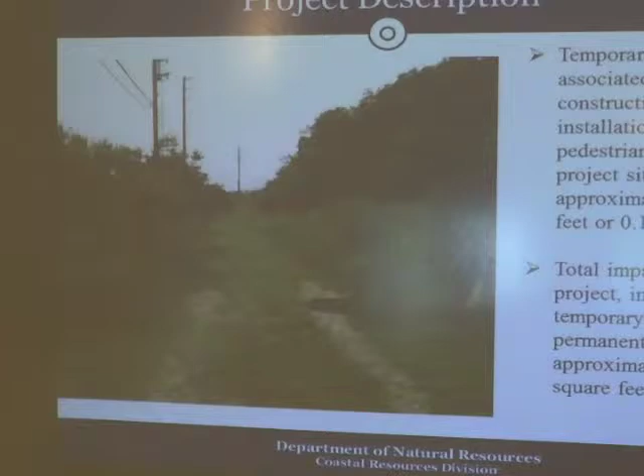In addition to the boardwalks, for pedestrian and bike use, there's also going to be temporary impact associated with installation of silt fence, and no equipment will be operated in the marsh. We identified areas where someone would need to manually install, so it'll be foot traffic only, and again, it is temporary. Total impacts for the project, again, 0.31 for the bridges over the coastal Marshlands areas, and 0.13 for installation of the silt fence.

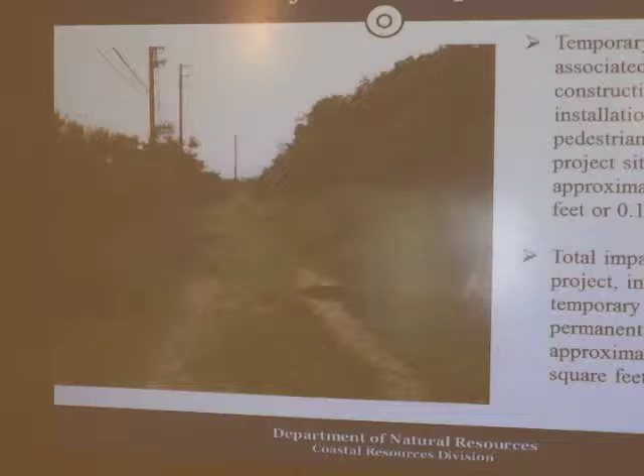Should the committee determine that the proposed project is in the public interest, department staff recommends the following special conditions: During construction, equipment other than what is required to perform work, materials or debris may not be placed or disposed of or stored in marsh jurisdictional areas. If the elevated bridges or boardwalks fall into disrepair because of erosional factors that are site-specific, no riprap or fill is authorized, and the permittee may be required to provide a post-construction survey.

No question? Okay, if there are no questions, no further comment, what's the pleasure of the committee? I'll make a motion to approve the recommendations of the staff. We have a motion and a second. Is there any further discussion? All in favor of the project, say aye. Aye. Any opposed? Thank you very much.

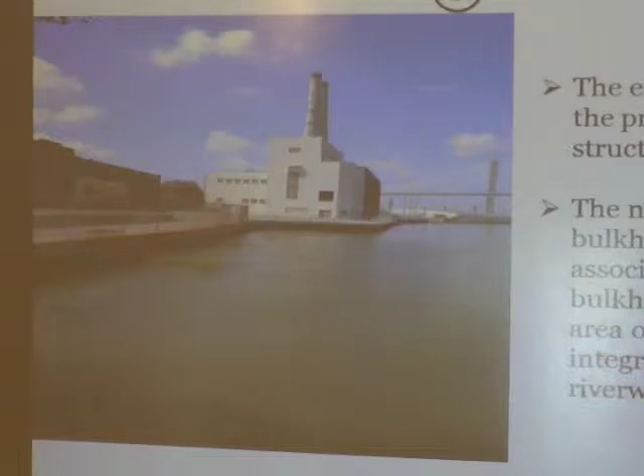As part of the project, a new steel sheet pile bulkhead will be installed in front of the existing deteriorating bulkhead. A new pile-supported riverwalk extension, which includes a 16-foot wide platform at the northern end of Martin Luther King Jr. Boulevard, will be constructed. Impacts total...

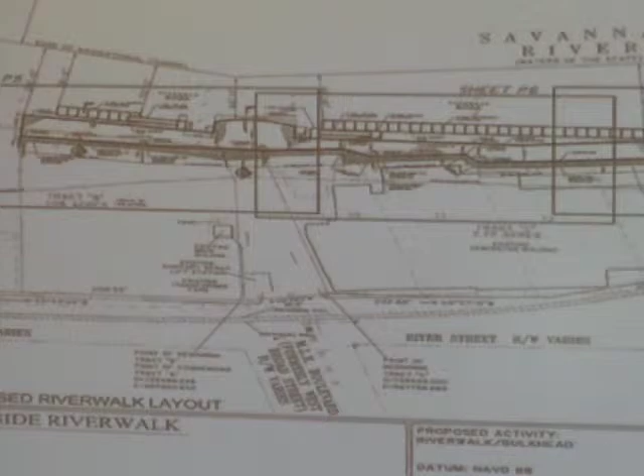34,703 square feet. The existing bulkhead, which is structurally compromised, will be replaced with a new one. The new one is needed to support the proposed riverwalk. The new bulkhead will total 1,092 linear feet.

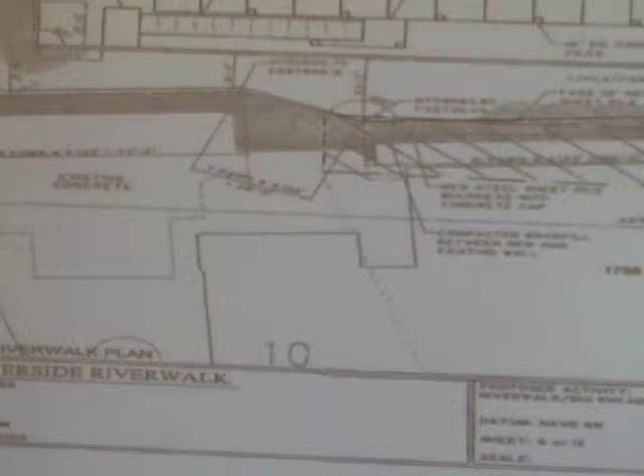5,868 square feet of backfill will be required in the narrow void between the new and old bulkhead. The pile-supported riverwalk platform was designed to match the dimensions of the existing riverwalk and will total 27,619 square feet. The new riverwalk will be for public access and enjoyment.

At the northern terminus of MLK will be a 16-foot platform extension, which will be for additional public access and enjoyment of the waterway, and totals 1,216 square feet. This platform extension will serve as the city's new public entrance to the entire Savannah riverfront.

All structures are proposed over open water and no impact to vegetated salt marsh will occur as part of the project. The project will not impact navigation as confirmed by the Savannah Harbor pilots. The structures will be a minimum of 62 feet from the federal navigation channel and will extend no further than 45 feet into the waterway, where the river is 830 feet wide.

The proposed project is in the public's best interest, as it provides a great public good, all while incurring only a minimal effect on the environment. The new extension of Savannah's Riverfront Plaza will service the more than 12 million people who visit River Street each and every year, providing a great economic boost to Savannah, Chatham County, and the state of Georgia.

With respect to the proposed special conditions, we worked closely with staff throughout the permitting process, and we're a little surprised about special condition 1 earlier this week. So we therefore respectfully request that special condition 1 be deleted for the following reasons.

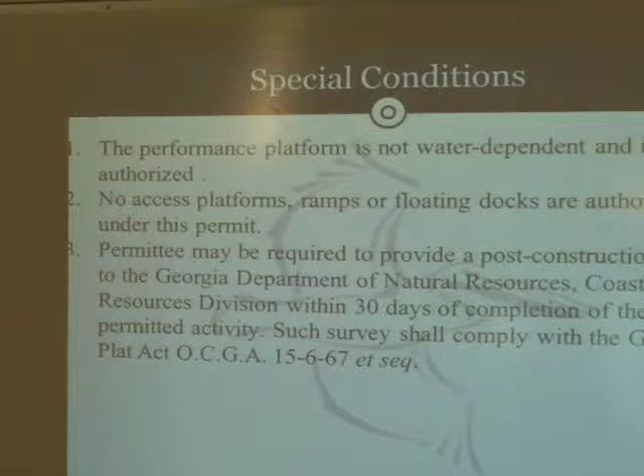Also, the platform will not cause a conflict between recreational and commercial vessels. The applicant spent considerable time and effort working with the Savannah Harbor pilots to specifically address navigation concerns, and received a letter from them in support of the project, which was provided to staff and is part 3 of your handout.

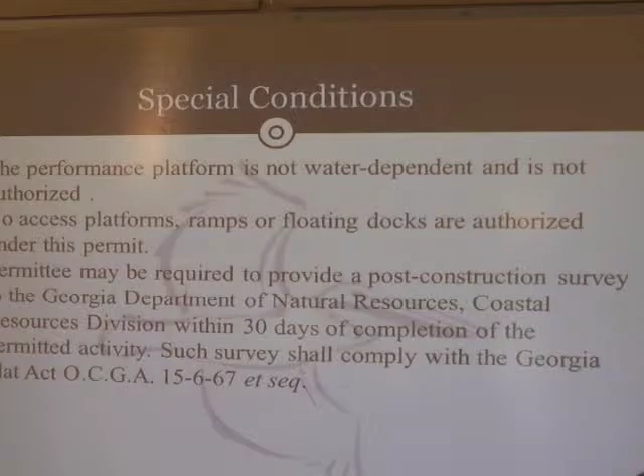Pleasure of the committee. I'll make a motion to go with the staff. We have a motion to accept the staff project with the staff's special conditions. Is there a second? Second. We have a second. Is there any further discussion?

The only thing I would say is that I think the fact that the city of Savannah is interested in this project the way it is a factor for me, as well as the Savannah bar pilots not seeing it as a concern. To me, I was trying to figure out if these private boats are going to be there, and it seems like they can't legally be there without the tie-up in the morning, because the larger ships are going to come down, and it's just not going to be feasible for them to be in that location. So I was just going to make that as a comment.